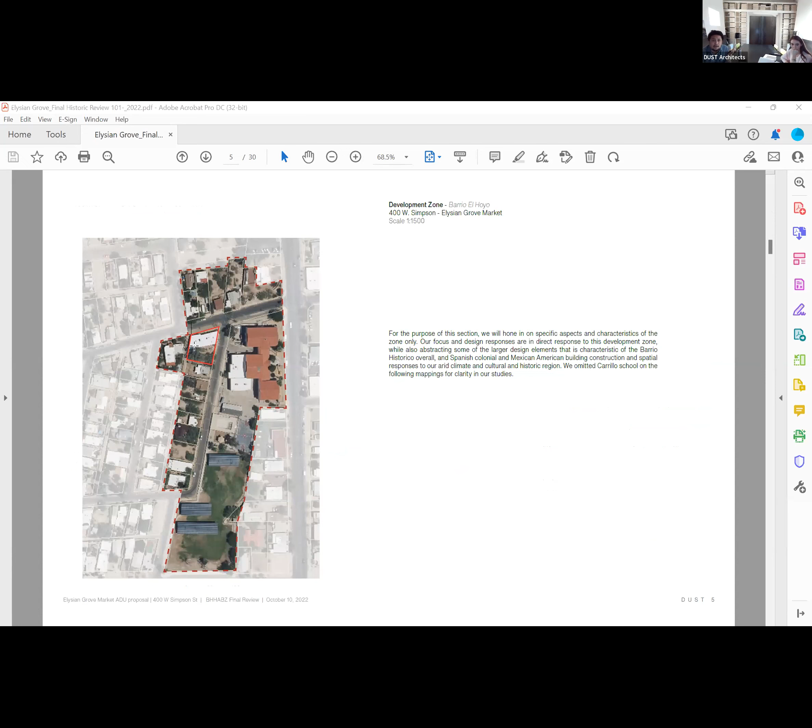So just to go over the development zone, a lot of this we've discussed before. For our purposes we've removed Carrillo Elementary and we're focusing primarily on Samaniego, even though we're acknowledging across the way on Simpson. As we move through the development zone, we're highlighting contributing structures, non-contributing structures, their street presence. We also took an overlay to look at fences and walls surrounding the properties. And one point we've added, zoned in on Samaniego, we're looking at accessory structures in our development zone and how that relates to our decisions with the shade structure and the storage structure.

So as we move through the development zone, about 5 of the 7 structures, contributing and primary structures, are pushing 0 lot line zoning. A lot of the front faces are pushed to Samaniego. The range is 12 to 14 feet plus tall from grade. And the accessory structures we're finding in the neighborhood, most are in the alleys, but a lot of them are pushing 0 lot line or near 0 lot line. They're clearly within the setbacks. And then I have some pictures pulled from that.

So as I said, our property, if you can see my mouse, is here, and we're looking at just the immediate context. We didn't go across the street to Simpson, even though they have some accessory structures pushing the property line, so we tried to keep it to Samaniego and the immediate neighbor. Moving forward, in red is a figure ground of our proposal. The bigger block being the ADU that is habitable. And this red wall here is the courtyard wall and a storage structure, an accessory structure, up against the property line. We also have this entry court facade that you see on Samaniego here.

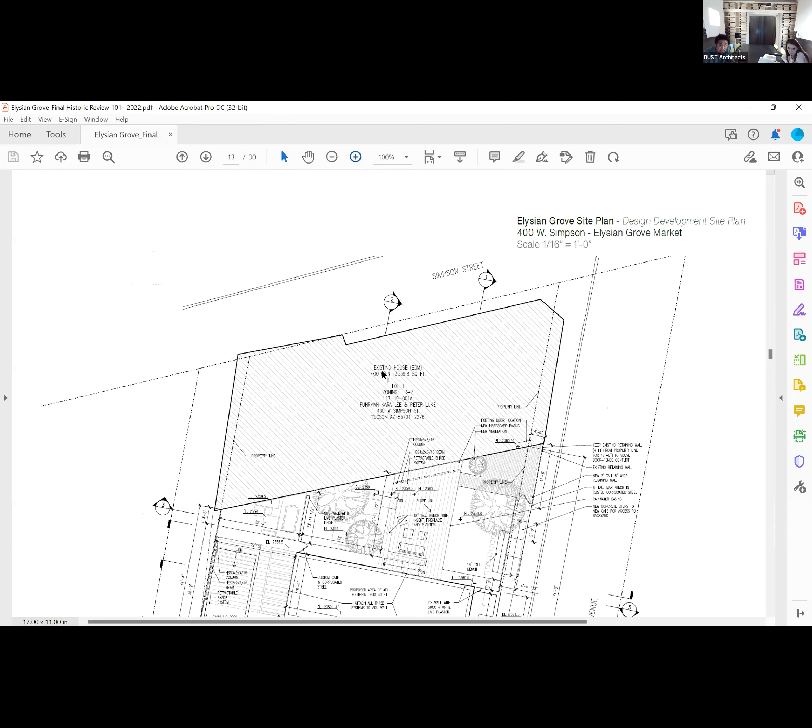Is that finished floor of the ADU? Of the ADU, yeah. So the ADU, we're landing at 2359 and 4 inches. It's about a foot lower than Elysian Grove finished floor. And where we're landing the car is about 59 - 2359, so about 4 inches below the ADU. And the difference - what's the elevation of the sidewalk?

61.5. Yeah, 61.5. So the sidewalk is about 2 feet higher than the inside of the carport. 2.5 - yeah. Is that going to work to get cars in there?

They're currently using it in that way with a steeper pitch, but yeah, okay. Right here - what did you estimate that pitch? Let me see if this section has it.

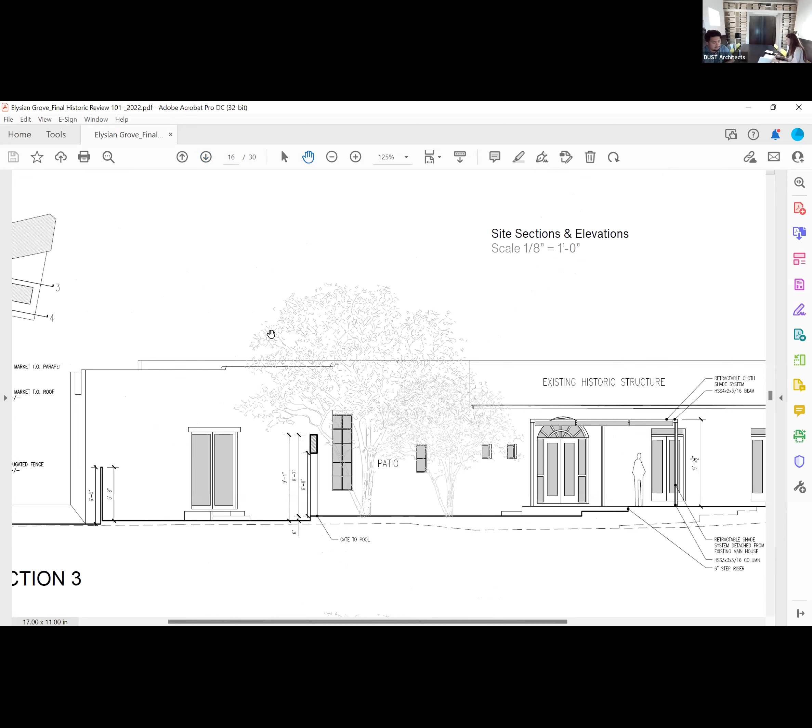So you can see on section 4 where the existing slope is in dashed, and we're just getting an ever so softer slope, and then to be able to land here. We're trying not to park on a slope, but I think in the field we're hoping to manage and mitigate that. We do have a retaining wall here, trying to hold most of that slope so that you can access the site, but there might need to be some fine tuning in construction.

So that page is the next set of images to give context.

Over here we can see the west shade structure spanning over the pool. This is a retractable shade, and here's the columns that are dropping. We're hoping to integrate that into where we're attaching the fence, but right now we have them as two separate constructions.

So what zoning was calling out was this height here, the 10-foot tall, and I believe also the carport shade structure and the storage structure pushing up against or within the setbacks, and also the patio wall for the courtyard. Correct, because we're having the storage structures - you pull in your car for bikes, and some pool equipment will live in there, and house storage, all kind of living as a pseudo garage, but not really.

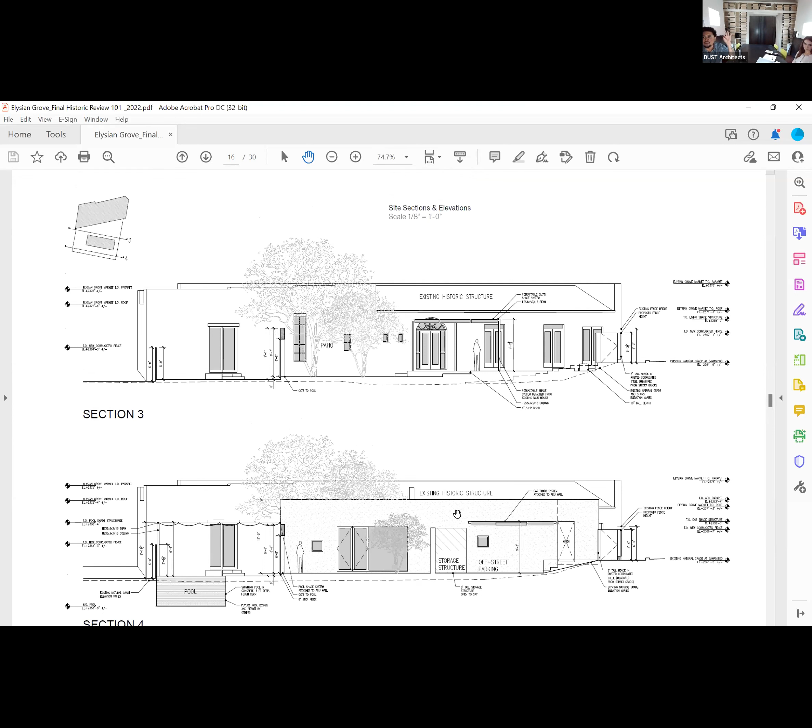If I can get that - yeah, I'm thinking it would be much simpler if we just went to those zoning review comments. They said based on the carport height of say 10 feet, the required setback is supposed to be 6 feet. We are providing this - my design is showing 2 feet, and the reason we have the 2 feet is X, Y, Z.

Those are the reasons we're going to need here eventually, because the historic review process can waive those setbacks, but we need to make sure they are consistent with what is existing. So you need to show - you talked about the prevalent setback on the Samaniego side being almost a zero lot line, which is fine. You've demonstrated that, but you need to pick each of those setbacks and say zoning called this, the height was this, the setback is this, we're providing this, and that is why.

Okay. Setback is the main issue here. I have some of those images coming up, hopefully to address that.

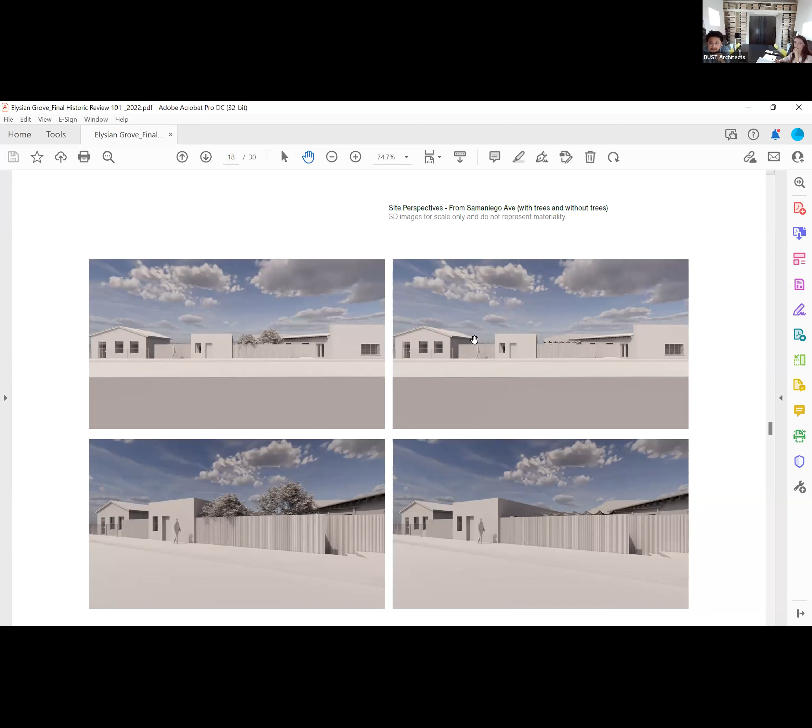The trees you're planning to knock down, are those native plants? They are mesquites, but we're hoping to replace what we remove with similar. So you take out a mesquite and replace it with a mesquite? Yes.

Material historically was limited by the proportionate scale of lumber available, so you got mesquite Y posts and beams with saguaro ribs to span. The shade is not hard, but it is a filtered light, and that was sort of the quality our clients asked us to pursue. For us it gives a lighter, temporal, and organic feel to allow light and air to pass through, and those are the qualities we set up for ourselves in trying to do this.

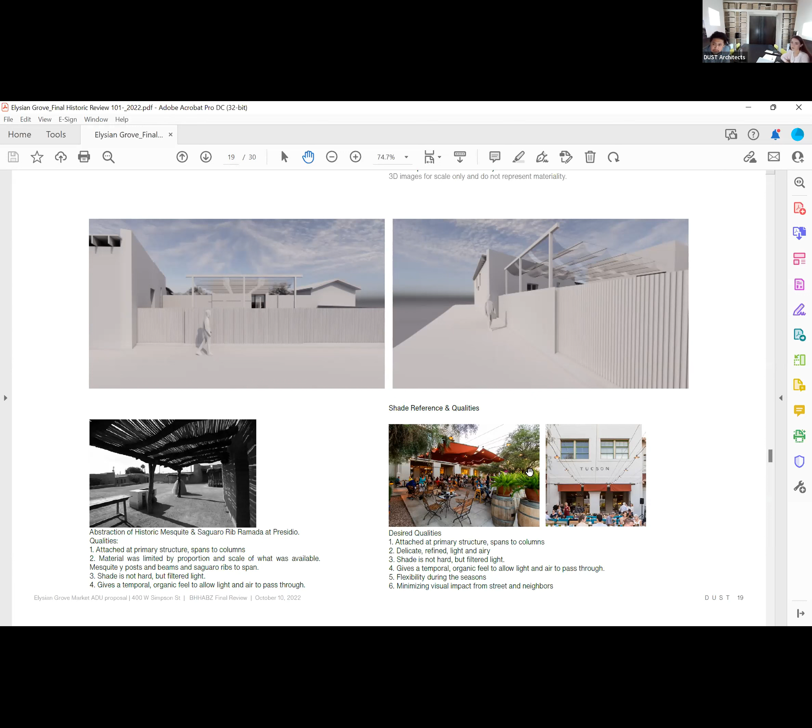And using the images of the more common precedent at - where is that - Maynard's, and embodying that, we have a structural post and beam system that we can span cables to, and we have a retractable shade system. This would be for all three shade structures in the back.

Tying to some of those qualities we touched on with the historic mesquite, but also allowing the owners flexibility to use during the seasons when they want sun and when they don't. We're also really trying to consider minimizing that visual impact to the neighbors, even though we discussed last time that it is a new sort of typology in the area. It historically hadn't been used, but we are trying to abstract those qualities.

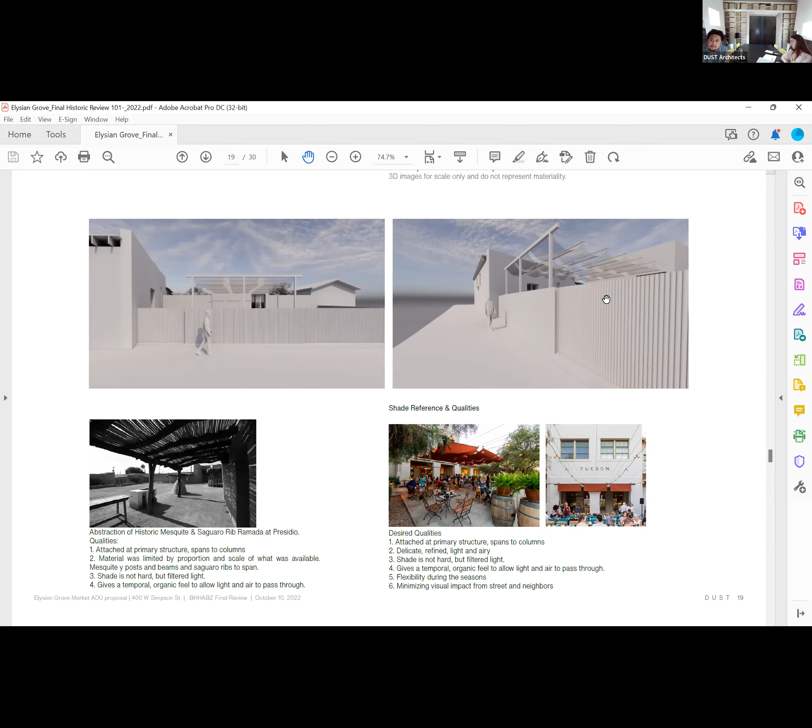Michael, this maybe addresses some of what you were touching on. When we looked in our development zone for shade structures, the typical ones we found were attached to the building, were of wood construction, and provided hard shade. Those were, to me, opportunities historically where residents and the community would infill those structures. A porch becomes a sunroom, a guest room, or an expanded kitchen. And those were really only what we could find in our development zone, where accessory structures were pushing the lot line.

On Samaniego in the alley, we have this garage that is pretty much at the lot line, 12 feet tall. Next to it, it looks to be a converted porch into an extension of the house. To the eave from the alley, it's about 10 feet tall to that edge. And then 408 Simpson has a shed structure that's 9 to 10 feet tall, depending between parapet and roof structure, masked by quite a bit of vegetation, and maybe 2 feet from the lot line. So they're not quite on it, but all of these structures are within the setbacks.

So looking at that sort of sets the precedent. For us, we feel there's a specific difference - we're just hoping to provide shade that's flexible. We had considered instead providing wood beam and hard shade, more weatherproof and darker shade that matches the construction of the development zone. But in discussing with our clients and reviewing it, we felt that we didn't want to imply that this space could be remodeled and taken as habitable for any future use. So we're trying to leave these shade structures with a more temporal, temporary feeling, and not imply that you can infill that space. The hard shade at the scale we're providing would be comfortable, but the way the owners are looking to use it, the flexibility through the seasons and providing something more light and airy was the driving design decision.

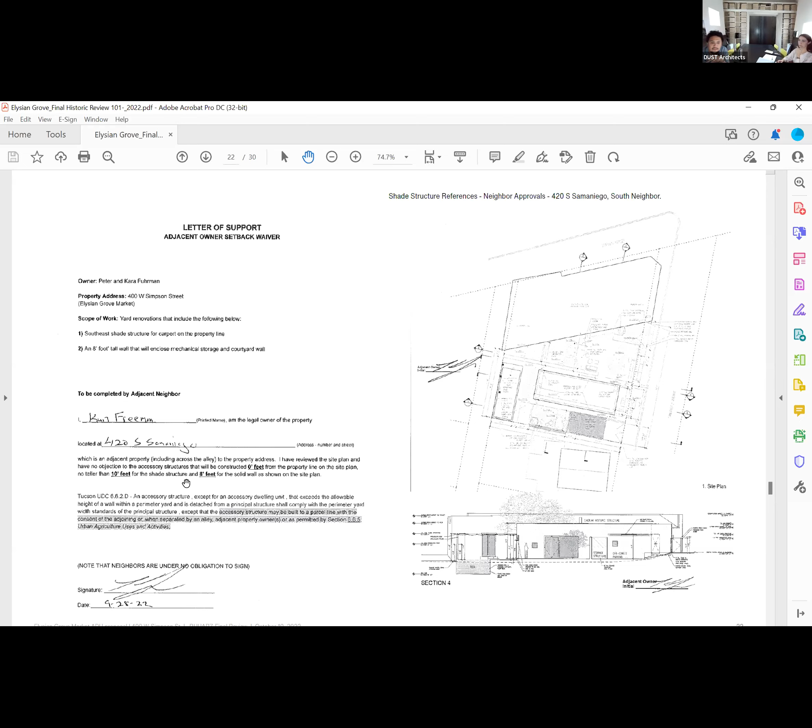Zooming in more onto the ADU, we haven't really modified much here from the last conversations. Our focus mainly was on the shade structures and trying to explore any other options there. Windows are relatively the same - one that adjusted was the west window, just changed in proportion.

Sorry. Were you pulling up this one? Yeah. Skip. Okay, sorry, I had the wrong file.

Is this what you submitted? Yes. Okay, so the west window got enlarged here. Sorry, hold on - how was that window before? Like the one that you just saw, right there. Okay, and so now it's a fixed with a casement attached to it? Correct.

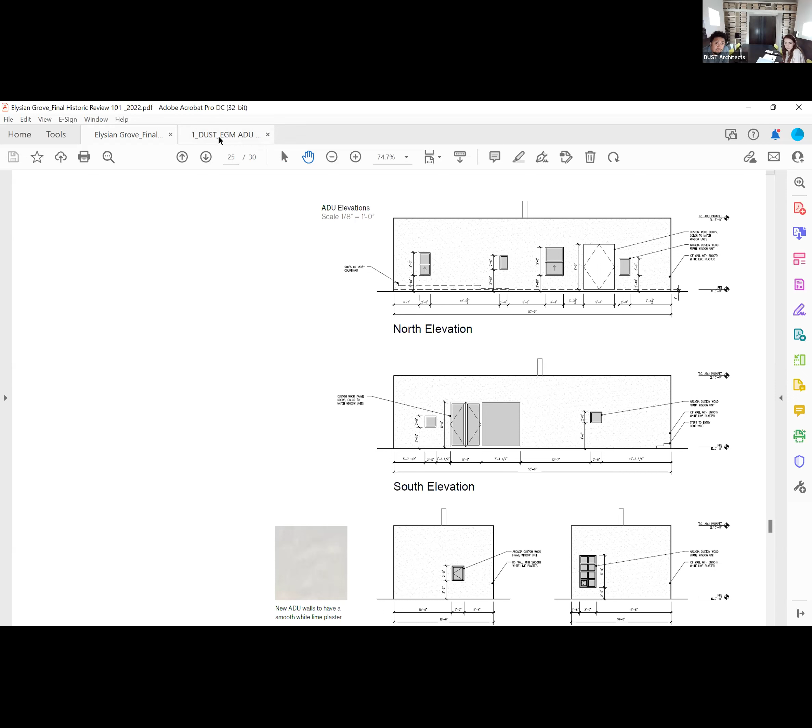Existing site conditions - that's just how it is right now. And some drawings for reference. That's basically it, I apologize. I'm kind of leaning on that we've presented this 3 times, so if there's any specific questions you guys have, I can go back to the drawings.

What page is that? Jesus, I know that Jody told me that this has been presented like 3 times as a courtesy review. I was trying to locate the legal action report that shows that. Can you, if you have it in your head, tell me those dates? On the courtesy reviews - yeah, you say you have done 3 of them. Do you know what month you've done that? February, April, and July, I think so. Or June - when was I in? You should have that on the application. August - yeah, I think it was June and August. February, August, June, and August. Okay.

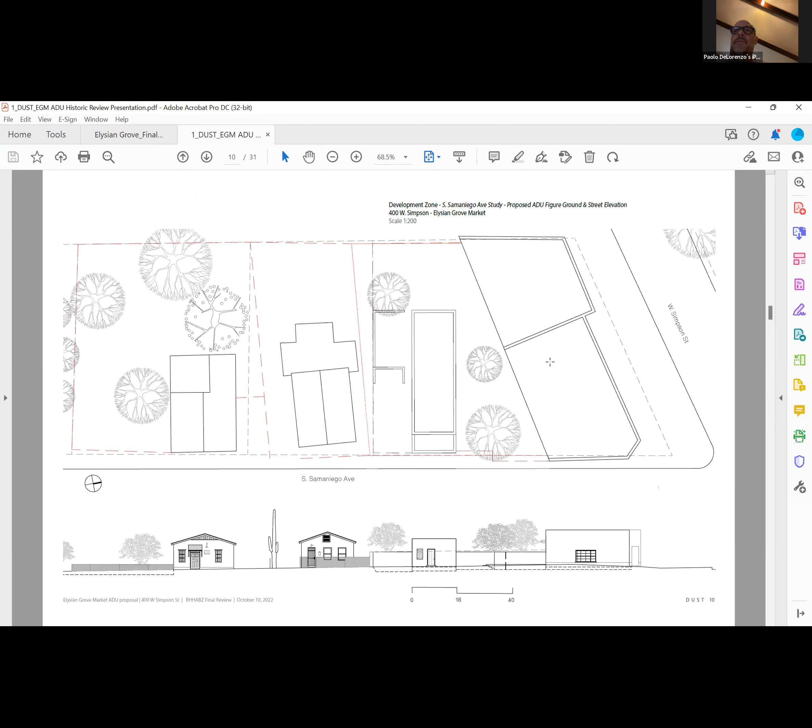I can't see the page numbers on mine, but where it's showing the elevations of the ADU on the Samaniego Avenue elevation, at the top left. Not these, no, keep going down, Jesus. It's towards the bottom.

Was it this one? No, it was a line drawing. Got it, coming up. Or next one, I think. Okay, that one. So the top left, the Samaniego.

So that's the door into the ADU, into the courtyard, correct? Correct, that's in the space, where the person is at, to the left of where you're pointing. So the opening next to the door, what is that?

Wrought iron? So we're looking to do an opening and provide some wrought iron, an example based on some of the precedents we've seen in the neighborhood.

So that's something you've seen elsewhere? That's hard to tell from that drawing. It is, there's a few on Simpson. It's not exactly, we're trying to riff. Right, but there's some on Simpson, there's some on Convent, and there's quite a few more.

I should have put that in there, I apologize for that. Oh, don't worry about it. It's that small detail that I overlooked on that one. But yeah, something, we didn't want the sort of jailhouse feel.

Right, and so trying to articulate some pattern or design based on the material, either steel flat bar or round. And just let it age, or is it painted? That's a good question, I think we were going to let it age. Okay.

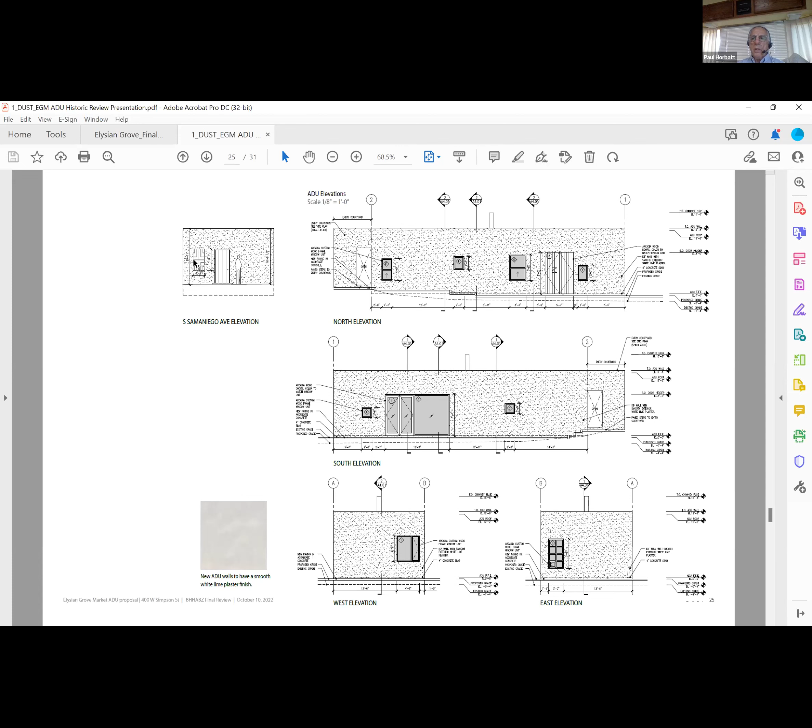Paul, Grace, do you have any questions? I have a question regarding the fence height on Samaniego. I think in the August review that was being shown as 5 foot 5 inches. The current fence is about 4.5 feet, and now it's being shown as 6 feet above the grade level. I'd like to see it no higher than the existing fence.

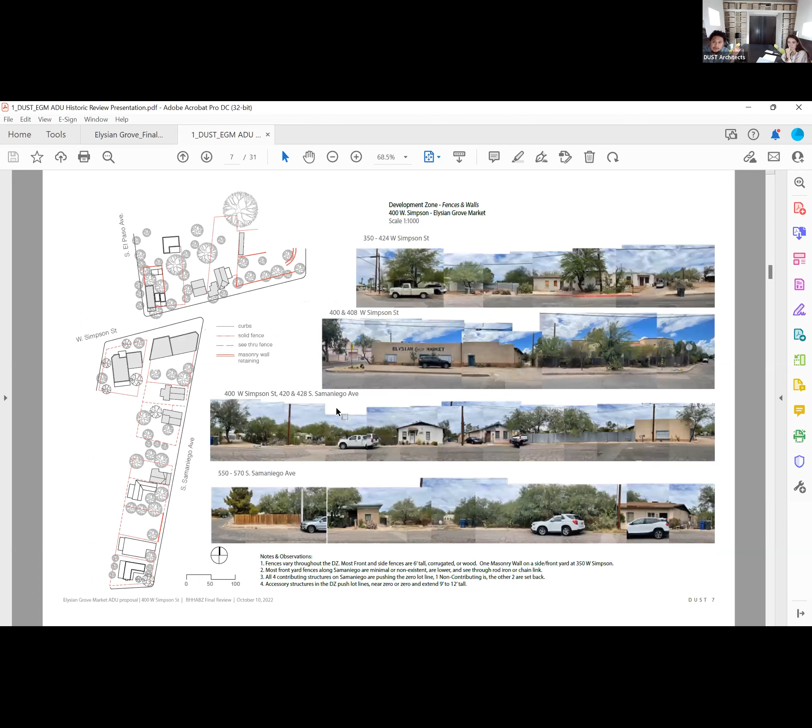So there's points where that fence is at 6 feet and it kind of follows existing grade. I'm trying to find our elevation that shows it. We have it at 5.5 at Elysian Grove, and we're trying to hold a straight line, and it goes to 6 feet at the southeast corner. So we're not trying to follow grade where you have the corrugated panels shifting down as the grade's going down. So we drew a line.

I'm sorry that I'm scrolling, I'm trying to find where this image is. Maybe this is the best one here. So where my cursor is, 6 feet at grade. And we're drawing a straight line, and by the time that grade shifts, we're at about 5.5 over here.

Okay, by grade, are you referring to the street grade or the grade at the property line? The grade at the fence. The grade at the property line? Sorry, I'm going to be technical there, the fence is not built on the property line. So it's the grade at the fence.

So what you're saying is that the fence is set back from the property line, is that correct? Yeah, I'm sorry Paul, the current fence is not on the property line. I'm aware of that, I'm saying the new fence, the proposed fence, is what I'm asking about. The proposed fence will be pulled in here where it's dashed red.

And then there's a little jog out here to descend into the courtyard, and that's the piece of property we need to look at. So there's a fence that exists right here. Right. And then a fence that exists at the red here. And so the old fence line is where this peach color is highlighted.

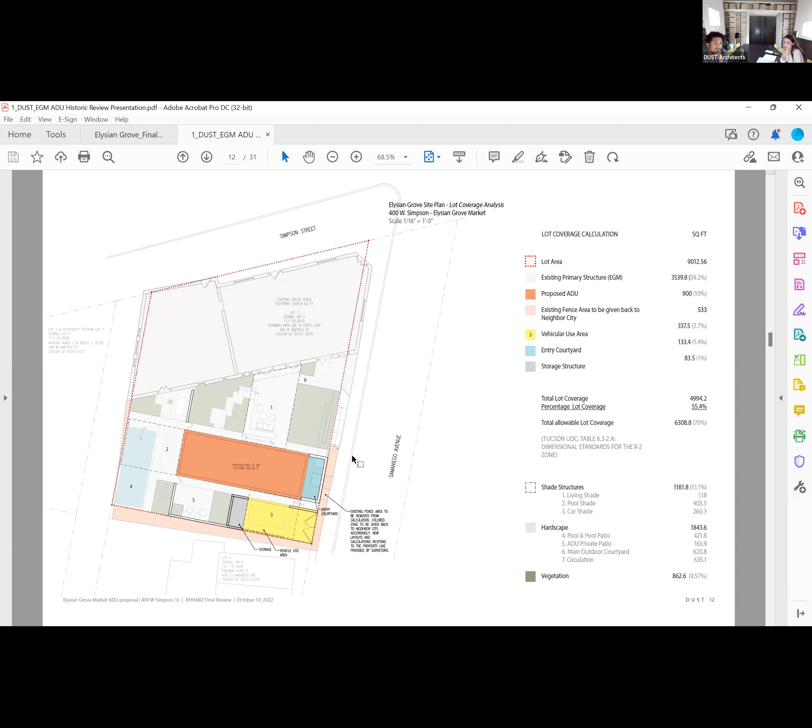So we're pulling it back, we're holding 6 foot at this corner, which is actually a little lower than where it currently exists. And we're drawing a straight line over to EGM, where it'll land about 5'5" from grade there. I think he's asking about the level we're referring to, which would be the existing sidewalk height, moving from here and up. No, when we drew this in CAD and we're taking the studies, we're taking it at the fence location.

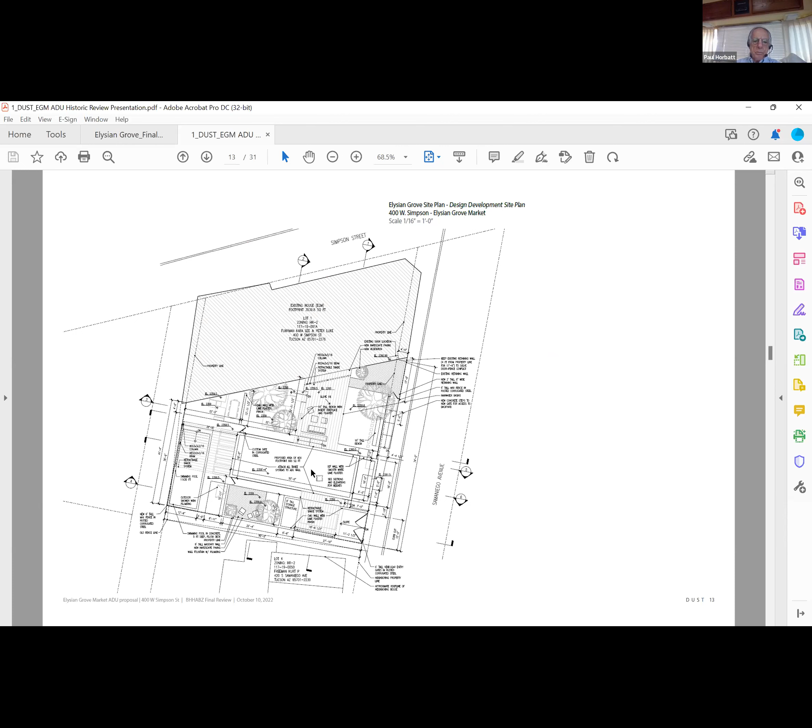So at the property line, what grade is doing at the property line, so that would actually be below the grade of the street. Correct. And perhaps you could specify that on the drawings. Okay.

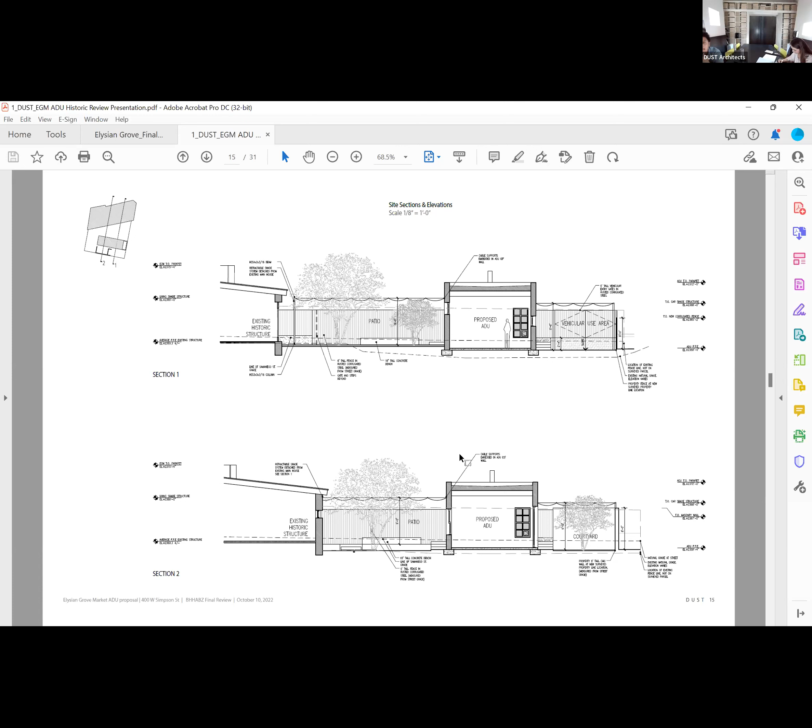So are you adding a new retaining wall over near the existing structure on the east elevation? Like I see here, existing retaining wall, new 2 foot tall retaining wall. Is the fence sitting on top of that? It is. We do need a retaining wall over there because of the current situation.

How tall will the fence be there? Those measurements I gave you were from the street side, so whatever that is from the inside, it ends up being like 7 feet tall on the inside. On the street side, it's 6. It's 5'5" in this corner from grade to the top of the fence, and then 6 foot over here from grade to the top of fence.

Okay, so part of that fence is going to sit on top of the retaining wall. Correct. Okay, yep.

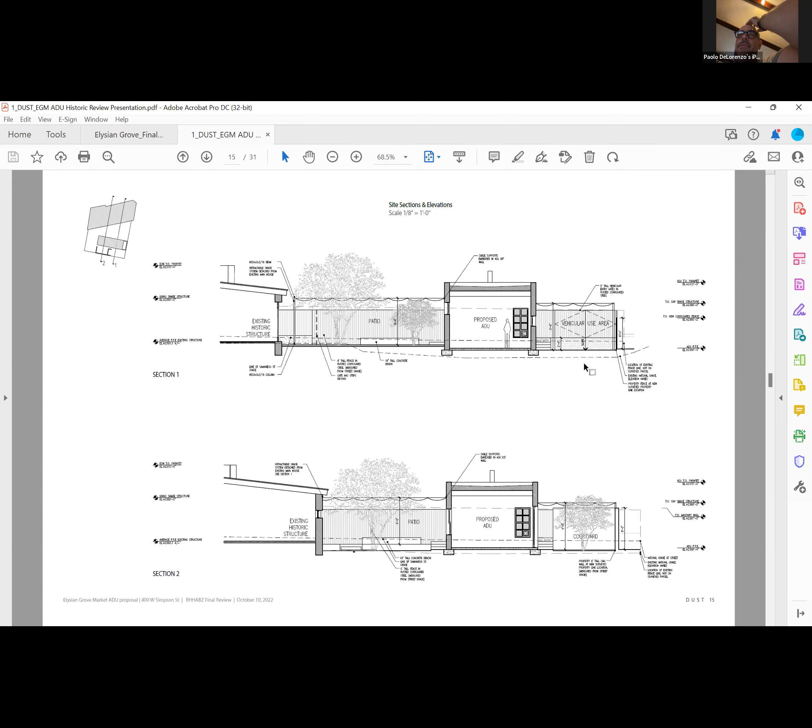Grace, did you have any comments?

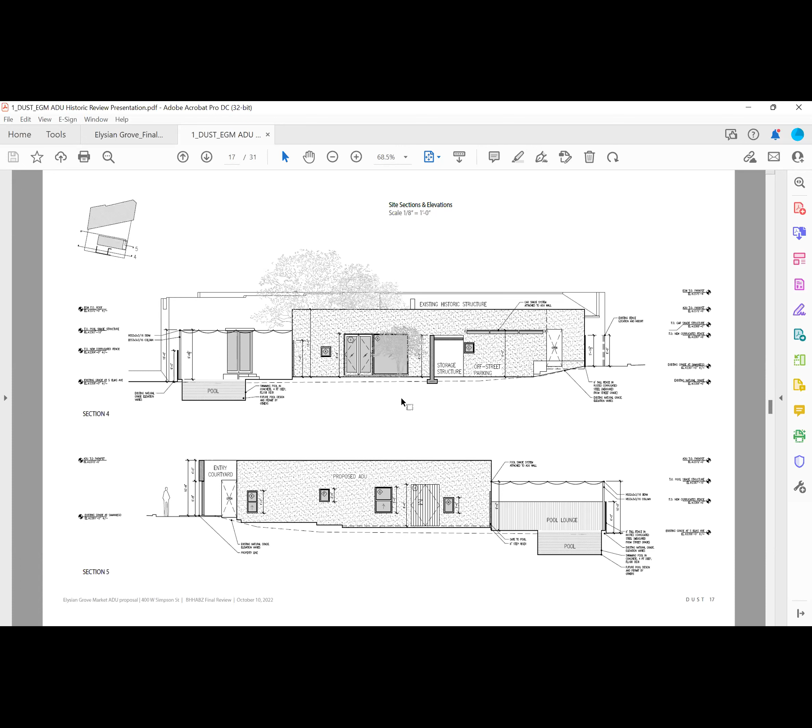Can you just quickly run through what has changed in the design since the previous review? I know we talked a bit about the zoning, but there's that change to the window. Is that the only thing that's really changed in the architecture? Correct, only that west window.

From the feedback we got in the last review, it seemed like we were good with the architecture and openings, and it was those other things that zoning was going to call on—a shade structure being a certain height at the fence line, and the wall to the south, the courtyard wall being 8 feet. Those were the major takeaways I got from you guys.

Got it. Yeah, then no, I don't have any further questions.

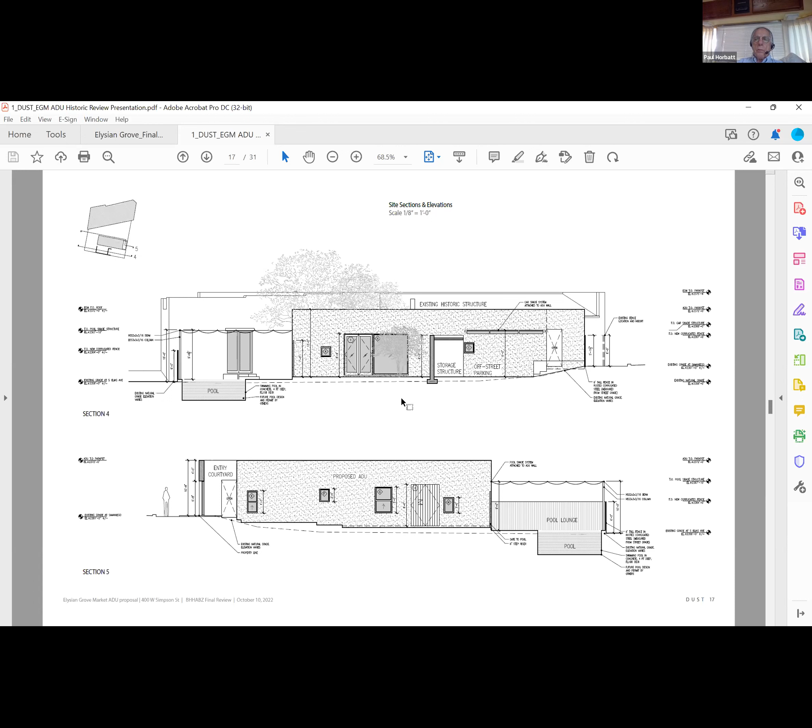Yeah, I would like to again raise the subject of the shade structures. I objected to that in the past, and my objection has to do with the fact that, one, it's going to be a very conspicuous, visible element from basically three sides of the property. And also, there's no historical precedent for anything like that in the barrio. So I personally find that objectionable.

Thank you, Paul. I'm speaking from the perspective of someone who's lived in this neighborhood for half a century. I think it degrades the visual characteristic of the neighborhood.

I totally appreciate that, but I'm in disagreement. We studied hard shade—we looked at 4x4 wood posts, rafters and beams, hard shade and metal roofs—and it seemed really imposing and more visible from the road, both in the shade quality, the material used, and the amount of shade and space it takes up. We kept coming back to this lighter, more organic thing.

As I mentioned in my presentation of what exists on Samaniego, historically porches were added on to the primary structures.

Well, if you're looking at these drawings you're displaying right now, these are all non-contributing structures—built after the establishment of the historic zone.

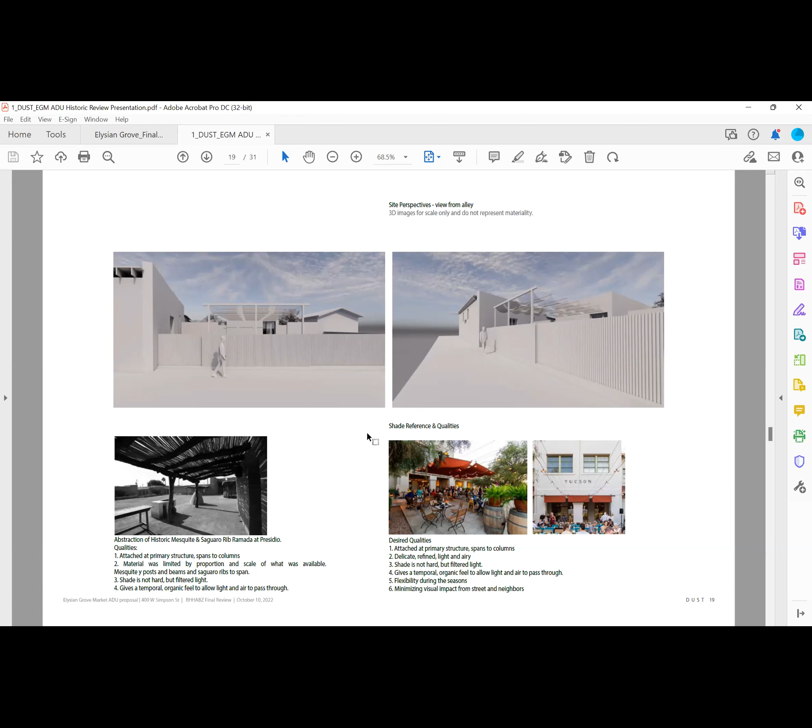Yeah, in the previous reviews I've been for the shade structure. I think it's relatively inobtrusive, it's a light solution like you're saying, and I'm sold on the precedent. Also, the views from the alley side - the other side we're not getting a visual of it too much. So as far as I'm concerned, I'm not worried about it.

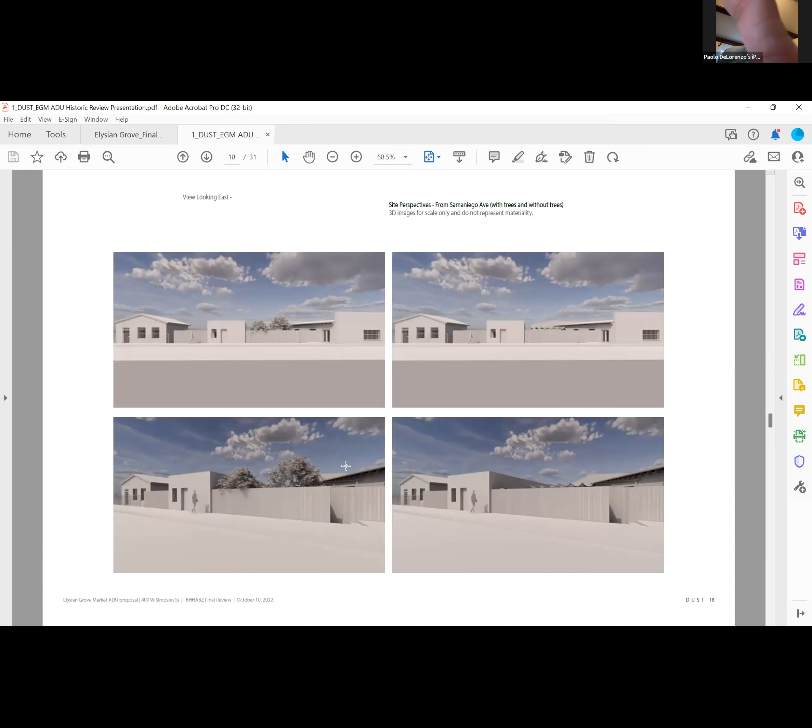Yeah, the biggest visual, isn't it on the west alley where it's really tall right there? It is, and it's 10 feet from grade right there. And those structures, as you walk down the alley, I think I got them at 12 foot on the lot line. 10 foot is this one here from grade, and then 9 to 11 foot tall across the alley.

And we're showing them sort of close and filigree, but the operability is something the owners, especially seasonally, are going to use. So it's going to have this organic feel - sometimes the shades are drawn, sometimes they're back. And I think when they're back, they're going to be less imposing.

Yeah, but still the posts are going to be there regardless. I'm on the fence about that, Paul, because if we were to say I'd want a garage in the alley, then we're talking about putting a 12-foot tall structure and a garage door and having enclosed space really pushing up against the property line. So we're really only talking about 3 posts and a beam and some flexible shade.

It's partly why, if I looked at that west example we did and these become wood I-span rafters here - one, I don't get the flexibility of the shade; two, it's forever imposing; three, I think it sets a precedent that if this property exchanges hands, that spot becomes one that can be filled in.

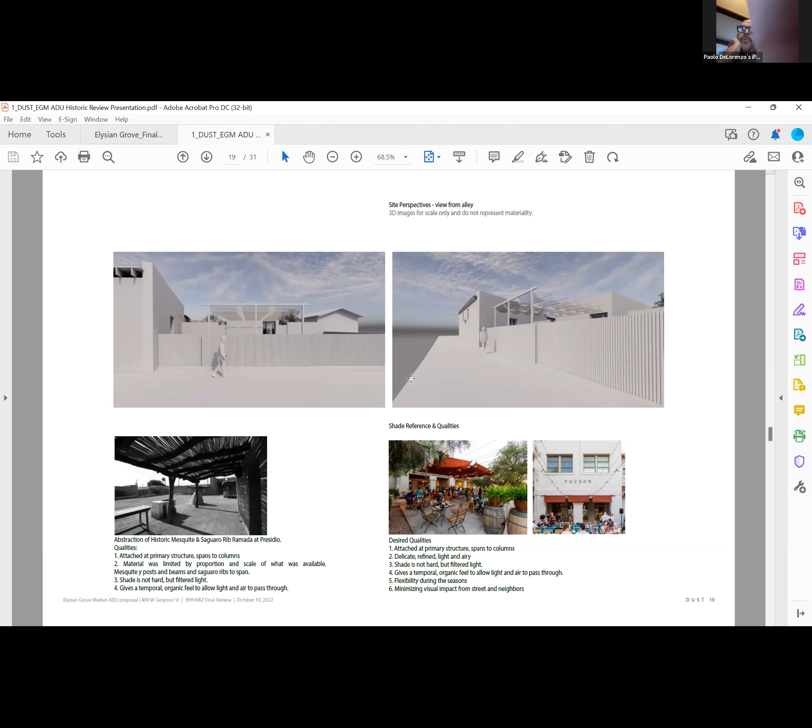What's the color of the ADU going to be? The ADU is going to be white lime plaster. These are good questions, Paolo. I'm going to go to the existing market - we have also... are you really using a lime plaster on a masonry structure now, or are you just calling it that, and it's actually a cement-based plaster? We're hoping to use lime with silica sand to get a tighter compaction and seal.

Okay, so it's to be low cement content on it? Yeah, that's on the new ADU. We haven't broached and crossed that bridge on how to address the main house yet with the owners. That looks to be cementitious, and there look to be places where it's separating from the adobe, and that looks like we'd need some experts coming in to advise on how to repair and deal with that plaster.

Okay, any other comments? No. Okay, I want to make a motion to approve the plan as is.

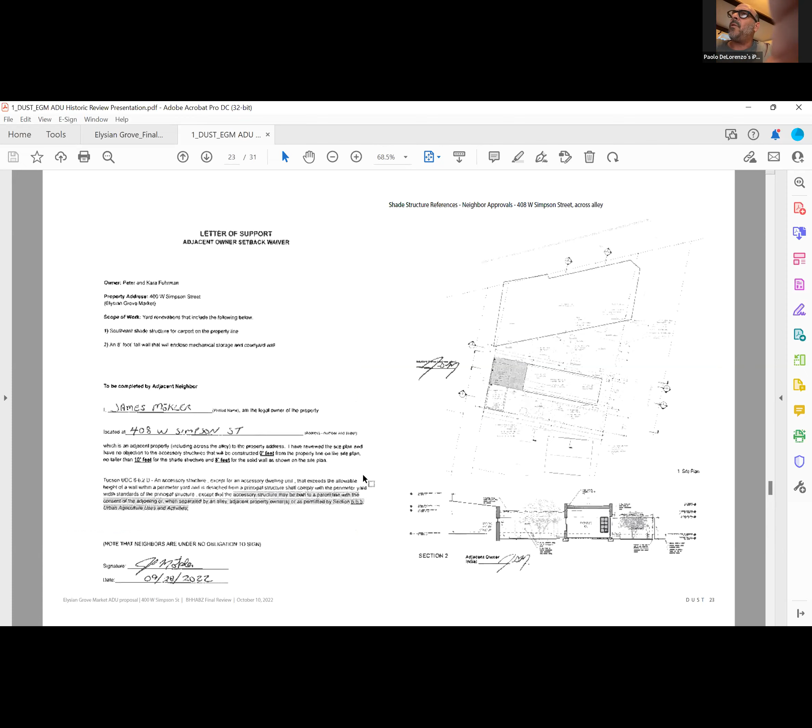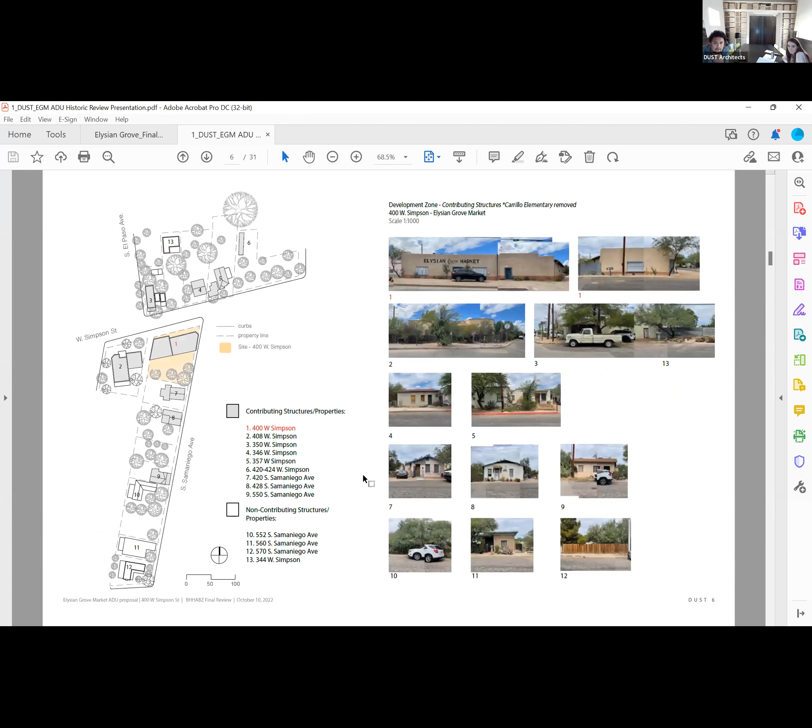And how many setbacks do you need waived, Jesus - is it 4 or 5? Let me go back to that sheet. Sorry. All right: one, post height of 10; two, post height of 9'2"; three, a wall height of 8 foot. I think it's just those three - the rest is just calling out the code information.

Okay, and the wall height of 8 foot entails the storage unit and also the court wall running east to west - and then that has a jog going north too, doesn't it? Yes, the courtyard wall that's attached to the shade structure to the south.

Paul H, I vote no. Okay, Grace? Yes. And I vote yes. So HPZ 22-086, 400 West Simpson, was approved by 2 votes yes, 1 vote no. Jesus, Artina, thank you. Thank you, everyone, we appreciate it.

You guys take care. Yep.